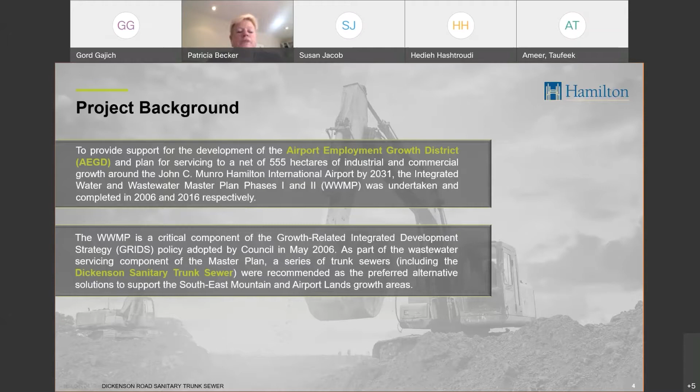That master plan is a critical component for the city, and it's related to the growth-related integrated development strategy. Council adopted that in May 2006, and we've been pushing forward with this. So this is a key project for the city to see move into construction. Next slide.

So this is from the master plan, and you can see with all of the colors, and when you download, you'll be able to zoom in even better. The highlighted pink area is the Dickenson sanitary trunk sewer. That is what we're looking at doing, extending from the edge on the airport land, extending eastward. The bright pink, the fuchsia, outlines the Dickenson sanitary sewer, following along Dickenson Road. Some of it has already been done. We're now doing this phase of it, looking at how we're going to do the construction and how we're going to deal with any potential impacts and mitigation measures.

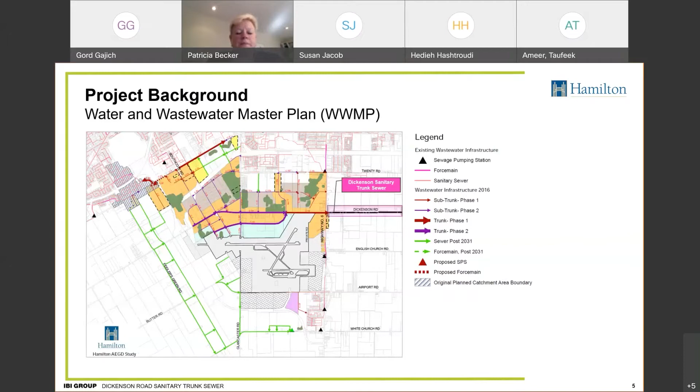Next slide. I'll ask Gord to now go through looking at the project area and the project description for you.

So as was mentioned, there's a proposed sanitary sewer, what we call a trunk sewer, that's quite deep in the ground for a good portion of the 10-kilometer run. There will be a portion that is a little bit shallower to the ground, and there's different construction methods being used between one section and the other.

So if you look at item 1 at the bottom end, that's the bottom of the line. Everything will be flowing from Upper James down to Regional Road 56. At Regional Road 56 is a line that already exists that we'll be tapping into. That line was already constructed a few years back, and it is in service today. So we'll be connecting at a quite deep location underground in the bedrock or hard rock below. We'll be connecting at that location.

In fact, some of the site is still cordoned off in that location where that shaft was originally, and where we'll be going back on, I believe it's the southeast corner on the page there.

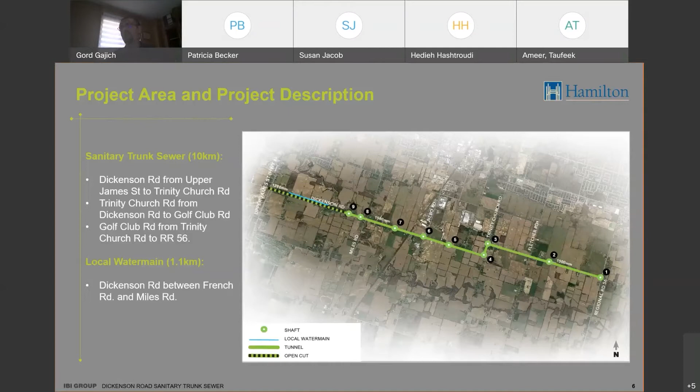Then, later on, for the purposes of operating, there will be additional maintenance holes that would have to be placed between those compounds at specific locations in order to maintain this sewer system once it's in service. So we would have a compound at every one of those numbers from 1 to 9, and they would be different arrangements depending on where they are.

In the case of Regional 56, the compound would be off the road in the southeast corner, where the original compound was for the previous section that was already designed and constructed years ago. Some of the other compounds that you see along the road would be right in the road, and there would be a need for a traffic management plan and detour plans, because we would actually be having to cut off a section of road and use it for the compound. So residents would have to either go one way or the other, and they would be completely understanding of this due to notifications done door to door, so you'd have advance notice of when we'd be requiring to do certain traffic management.

When we say traffic management, we mean car traffic moving in and out, which would be more localized at that point, and also pedestrian traffic as well. As we get through these tunnel sections, each one that's done, we would be closing them behind us. So we would not have all these openings and compounds at all times, because that would not be possible for movement of residents in and out of their homes.

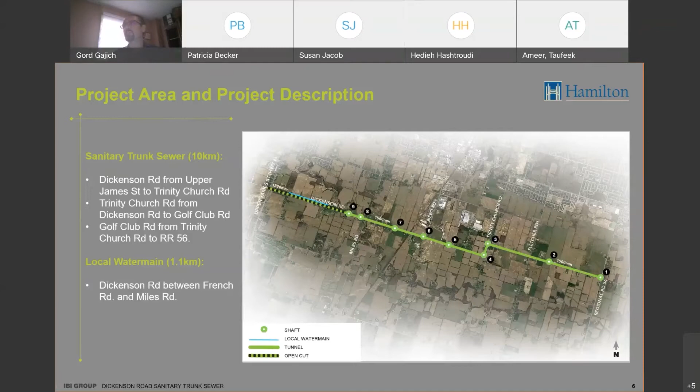This is what typically you would see if you were to get in the compound. I'll start with the tunnel, because the majority, 7.5 kilometers of this alignment is tunneling. This is just one type of tunneling that exists. In fact, the picture you see there is what we call microtunneling, and we're jacking the pipe into position. So there are some sections of this alignment near the end, more 7, 8, and 9 on the previous slide, that would be done in this type of format.

You would see a shaft that goes down quite deep, and this equipment would all be inserted through this one shaft. Of course, above ground, there would be a compound. There would be a little compound for storage of pipe, removal of spoils, or the material that's being mined out, and then grouting and so forth that goes to complete the system.

Above ground you would also see a crane potentially that would be lowering the pipe into place and lowering some of the mining equipment into place, and taking what we call muck cars, or the spoils that are taken out, out of that same shaft.

Very similar process for the other TBM type situation. The only difference is we mine the complete length of tunnel, and then later we come and install the pipe, whereas in microtunneling it's installed at the same time.

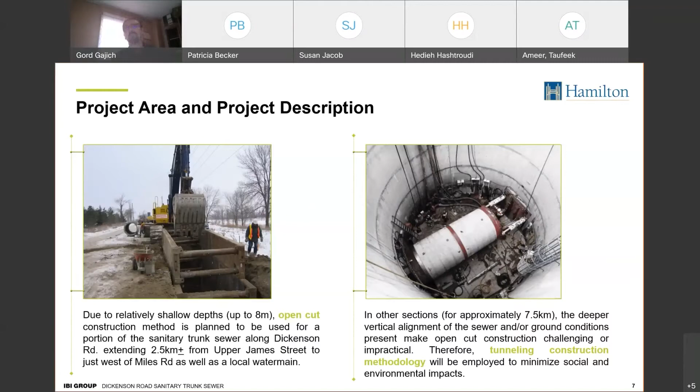This is an important slide, but it has a lot of words in there, and I apologize for that, but you have the ability to go back and look at this again if you'd like. After this live session, we're posting this on the city website so you can have the opportunity to go back. As we go through these points, these are our anticipated construction impacts and mitigation measures, and we talk about them a few times.

One of the first things is traffic impact. We are doing road closures for through traffic, but local traffic will have full access to residents. We are preparing complete traffic control plans and detour plans where necessary for people that need to go through this area, and complete traffic management will be covered.

When we say traffic, it's not only about cars and bicycles, but pedestrians as well. How will pedestrians get through this area? We are implementing complete control plans that provide access to and from residents throughout the section of pipeline, keeping in mind that only sections would be done at a time. This traffic impact would be mitigated by section, and you'd be fully aware of what sections are being done when. Part of that also involves the safety of pedestrians and cyclists during construction, so the same traffic control plans, barriers, and detours would be there for the public and residents in the area.

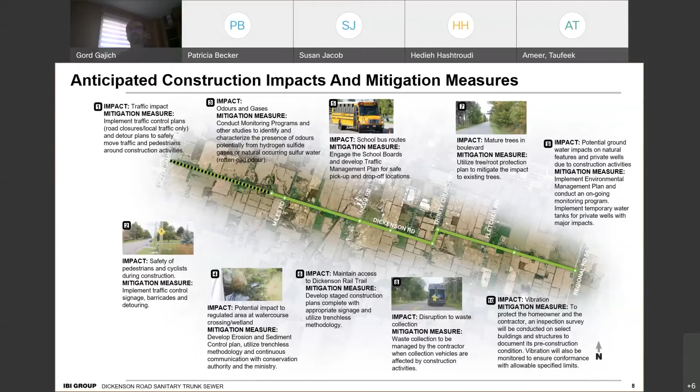The plans are developed at 90% and are being reviewed by all the specialists right now, but we anticipate this will go to final. They'll be mandated by the contractor and watched closely by city representatives as well as IBI representatives, because we're there to represent the city throughout all stages of construction.

We expect that, firstly, resident safety is paramount. We're trying to minimize impact to traffic, but resident safety in and out, for you to leave your homes, get groceries, go to work, we want to make sure you're allowed to do that at all times during construction. These signages are there to help that happen. We've already designed all this and will implement it with the contractor so they follow it to a T, keeping everyone safe coming in and out of the area.

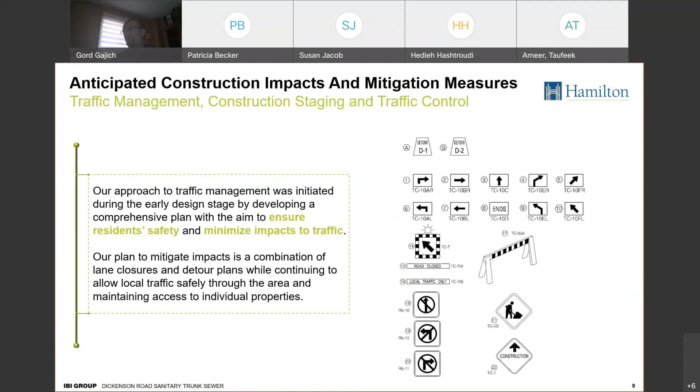It is disconnected from the surface water. So all the creeks and streams and so forth above are disconnected from the groundwater that we're dealing with down below. However, they may be connected to your wells, depending on how deep they are.

So there is a plan in place that if the wells are affected, if there's any major impact to wells, the city will be providing tanks to mitigate, to give you access to clean drinking water during the period of time when your wells may be impacted.

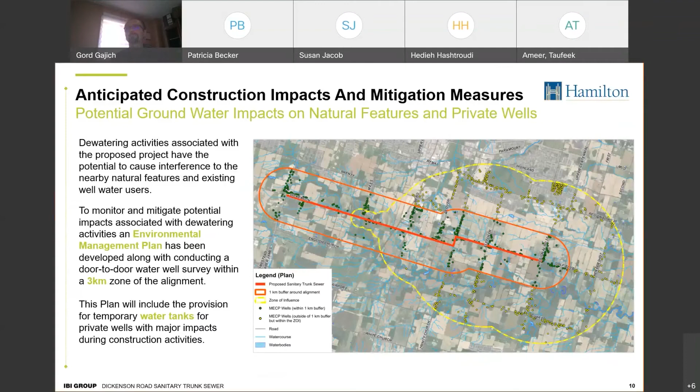So for us to monitor these, they're at different levels, some are shallow, some are very deep, so we want to be able to watch these very closely. And if we anticipate that there is going to be a drawdown somewhere well off the site, based on the depth of that, we can envision if that's going to affect any local wells along the route. So we're hoping to be kind of ahead of the game.

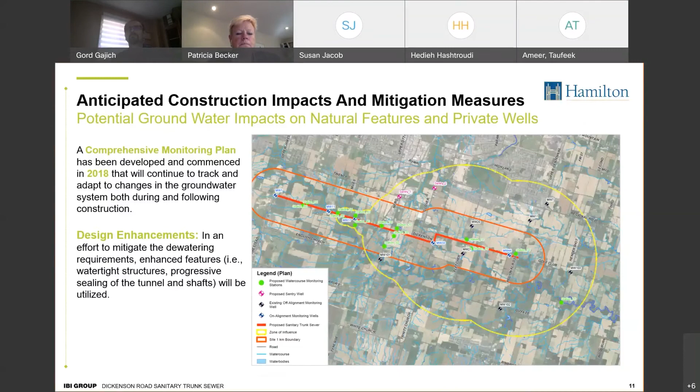Back to you, Pat. So we're not, the next two slides... just waiting for it to come up.

There we go. This is a summary of all of the mitigation measures that Gord walked through, the slide he had with the 9 different points, and then he had 10 points of impacts and mitigation measures. To make it a little easier for you to follow and get a summary, we've put it here.

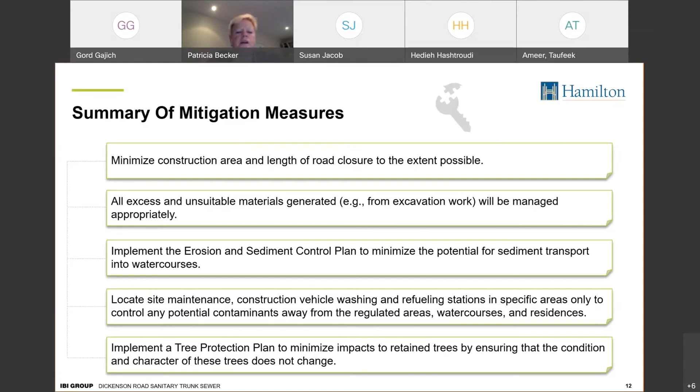So this page and the next page, we've summarized just what the mitigation measures are. If you just want to brief yourself and look at it again, the intent of this presentation is that you can go and look at it at leisure after this session. We wanted to make sure you had it. So both of these 2 pages are just a summary, and a reminder there's a couple points you'll want to look at, and then you can go back to slide 8, which had the map and all of the impact and mitigation measures listed out. Let's go to the next slide.

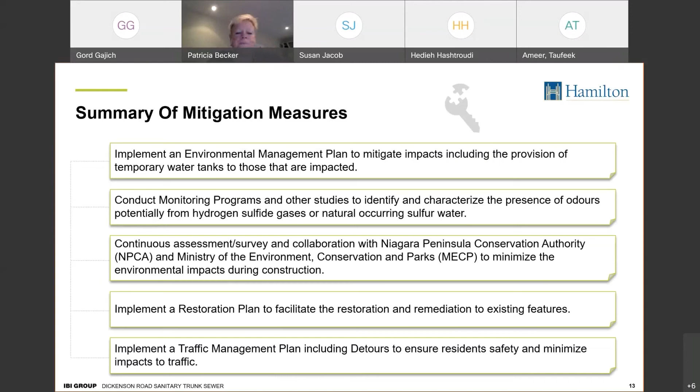That was distributed door to door. And as Gord mentioned, if you didn't receive it, or received it but didn't participate and would now like to be part of it, there still is an opportunity. It's been going on for over a year, but we still have time before construction. If you're interested, at the very last slide there's contact information for Taufeek Ameer from the city, and you can contact him to get a copy of that notice or to have yourself added to be able to participate in that private well survey. So while it was targeted and distributed, we recognize you may have missed it or may not have understood its importance, so there's still an opportunity to participate.

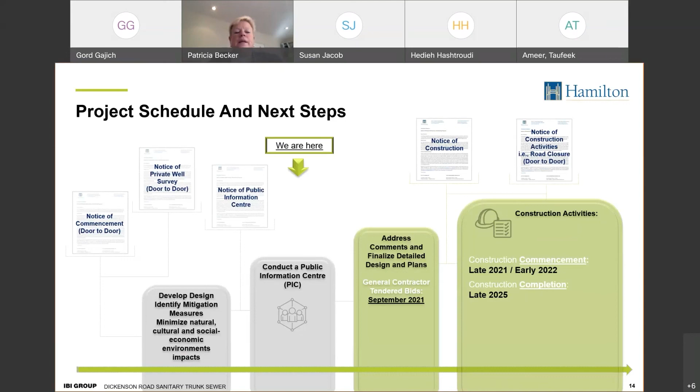So we have some of the questions that were submitted ahead that we're going to go through. We'll go through the questions you may have now, and then any other ones you want to submit.

This isn't meant to be the only point of direct input. There's been other communications, and we're hoping people continue providing us input, and we'll have that opportunity to also tell you what's going on through the notices. You can access everything through the same link for this public information center that was in that notice, which will also get you to where the presentation is and where project information is.